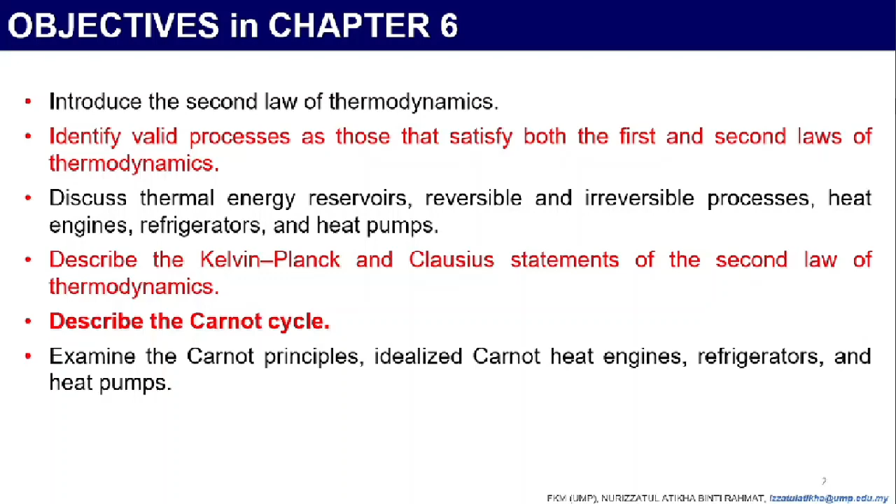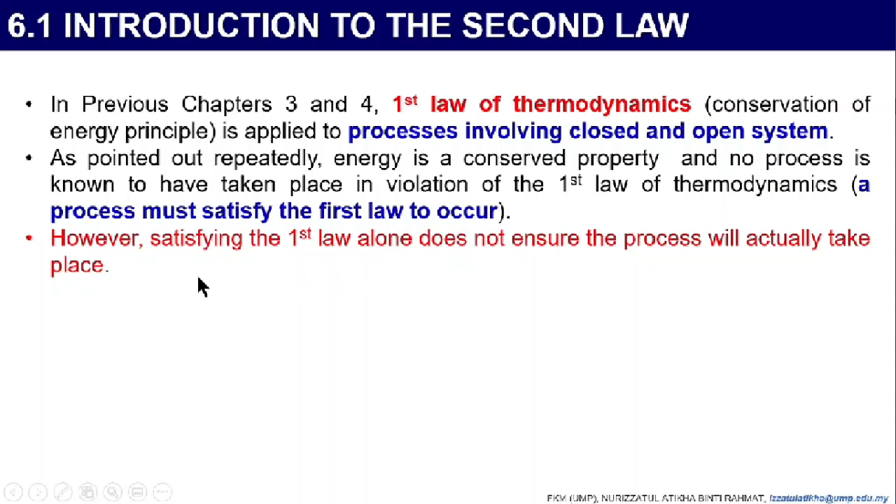In previous chapters 3 and 4, the first law of thermodynamics, where the conservation of energy principle is applied to processes involving closed and open systems, was discussed. As pointed out repeatedly, energy is a conserved property, and no process is known to have taken place in violation of the first law, where a process must satisfy the first law to occur. However, satisfying the first law alone does not ensure the process will actually take place. That is why we will learn in this chapter about the second law of thermodynamics.

Let's see this situation. Situation 1: a cup of hot coffee left in a cooler room. What will happen? Normally, you can predict what will happen - the coffee will eventually cool off. This process satisfies the first law of thermodynamics, since the amount of energy lost by the coffee is equal to the amount of heat gained by the surrounding air. We remember the energy balance equation for the first law, where energy is conserved: E in minus E out equals delta E.

Now let's see situation 2: a cup of hot coffee left in a cooler room. What will happen? For the reverse process, the hot coffee getting even hotter in a cooler room - this process will never take place. Yet doing so will not violate the first law, as long as the amount of energy lost by the air is equal to the amount gained by the coffee.

As you can see, situation 1 and situation 2 are the same. However, what happens in situation 1 and situation 2 is different. In situation 1, the coffee will eventually cool off, satisfying the first law of thermodynamics, where the amount of energy gained and lost is the same. However, in situation 2, it is a reverse process where the hot coffee gets even hotter in a cooler room. The total amount of energy is still the same; however, it will never take place. It is not violating the first law, but it will never take place.

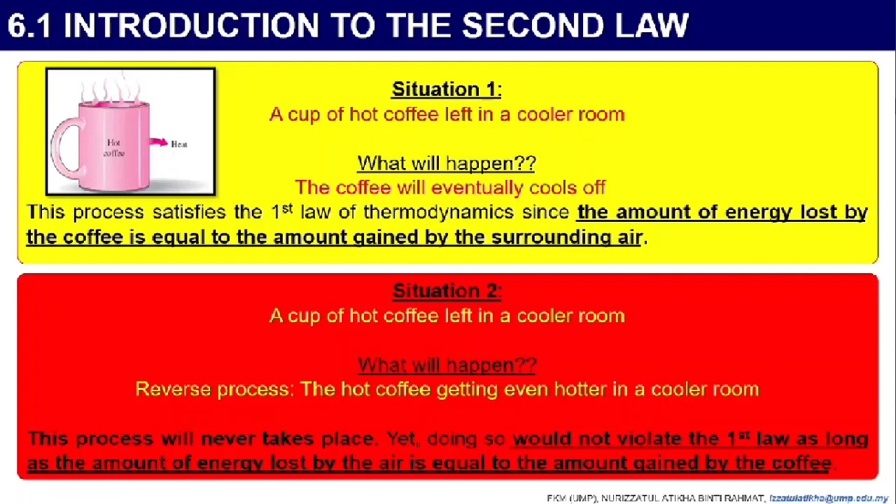Let's see: for situation 1, a cup of hot coffee does not get hotter in a cooler room. Situation 2, transferring heat to a wire will not generate electricity. These processes cannot occur even though they are not in violation of the first law. So processes must be conducted in one way, where processes occur in a certain direction and not in the reverse direction, because these processes cannot occur even though they do not violate the first law.

For example, if you touch something that is hot, you will feel burned. You will not feel cold. So that is already confirmed in this world - it is like sunnatullah, it happens like that, and it cannot become reverse.

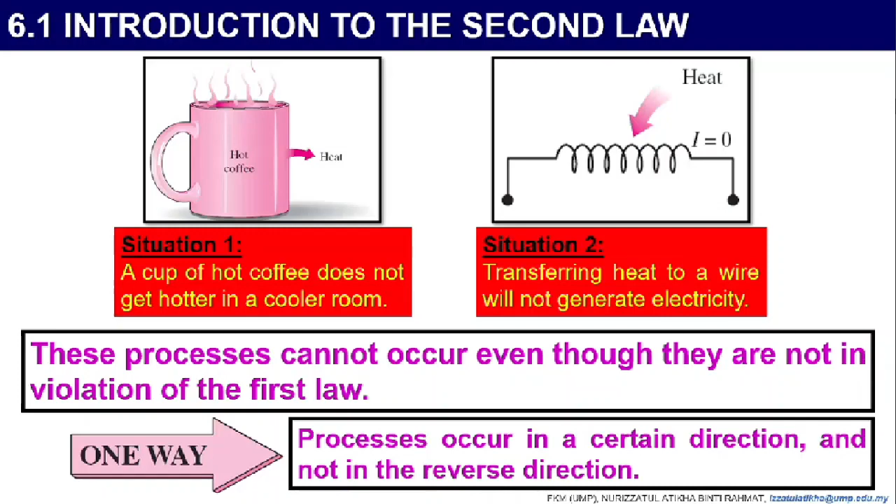So in this chapter we will learn about the second law and how a process is complete by satisfying both the first and second law. It's already written here: a process must satisfy both the first and second laws of thermodynamics to proceed.

Let's see the major uses of the second law. The second law may be used to identify the direction of processes. It also asserts that energy has quality as well as quantity. The first law is concerned with the quantity of energy and the transformation of energy from one form to another, with no regard to its quality.

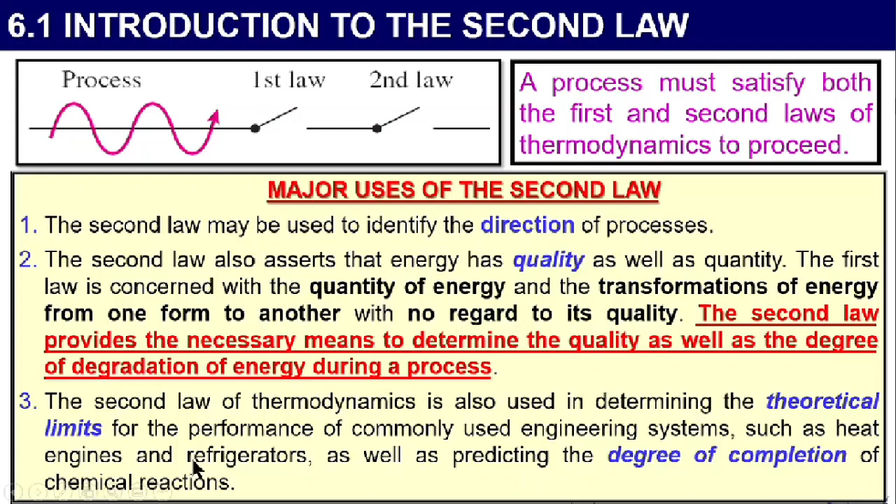However, the second law provides the necessary means to determine the quality as well as the degree of degradation of energy during a process. The second law of thermodynamics is also used in determining the theoretical limits for the performance of commonly used engineering systems such as heat engines and refrigerators, as well as predicting the degree of completion of chemical reactions.

Now we have learned about the definition of second law of thermodynamics. So now in subtopic 6.2, I will explain about the thermal energy reservoirs. What is thermal energy reservoirs? I believe most of you already understand what reservoirs are.

A thermal energy reservoir is a hypothetical body with a relatively large thermal energy capacity. How to calculate thermal energy capacity? Mass times specific heat. It can supply or absorb finite amounts of heat without undergoing any change in temperature, and this is called a thermal energy reservoir or just a reservoir.

In practice, large bodies of water such as oceans, lakes, rivers, as well as the atmospheric air can be modeled accurately as thermal energy reservoirs because of their large thermal energy storage capabilities or thermal masses. So thermal energy reservoirs can supply or absorb a finite amount of heat without undergoing any change in temperature.

For example, you pour one full kettle of hot water into a sea, into an ocean at the beach. So will the sea change temperature? No, it will not change temperature even though the sea absorbs the amount of heat from the hot water. That is the meaning of thermal energy reservoirs.

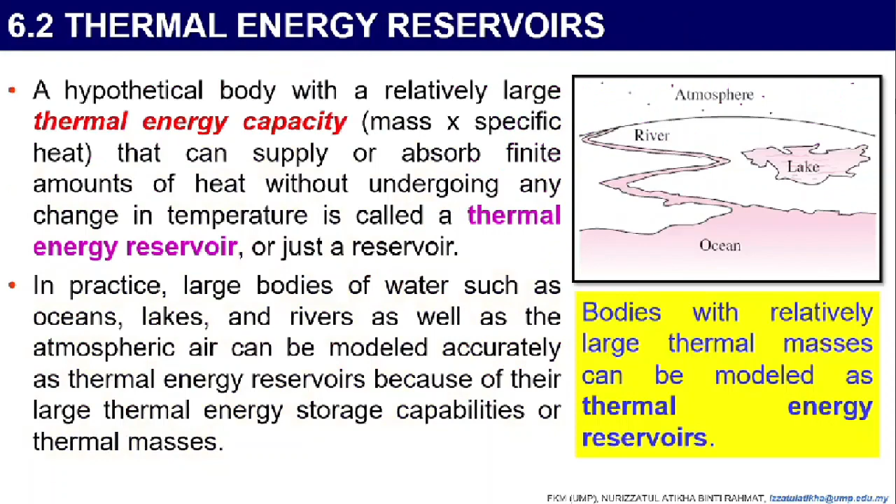A body does not have to be large in size to be considered a reservoir. This means that any physical body whose thermal energy capacity is large relative to the amount of energy it supplies or absorbs can be the reservoir.

A reservoir that supplies energy in the form of heat is called a source, and the one that absorbs energy in the form of heat is called a sink. Thermal energy reservoirs are also called heat reservoirs, so we have source and also sink. Thermal energy source will supply heat, thermal energy sink will absorb heat. But both of these are thermal energy reservoirs.

Now I will show you one video on the definition of second law and also some related information on the heat engine. So you guys can see from this video.

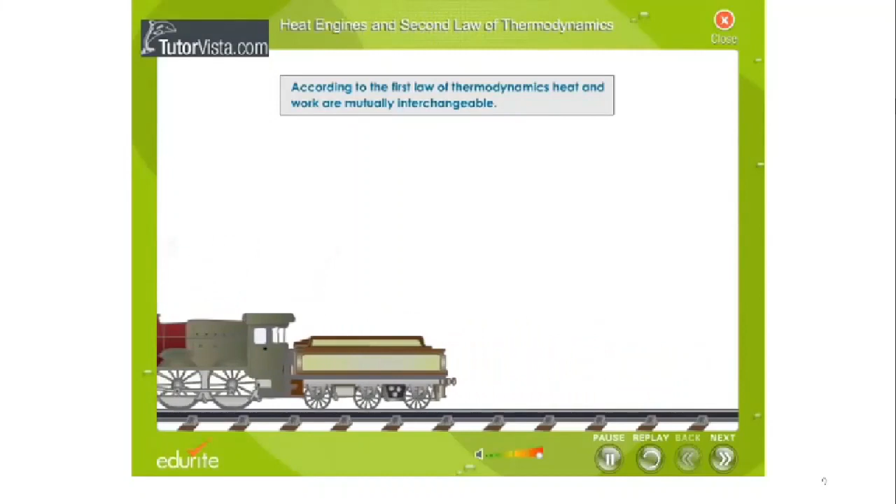Heat engines and second law of thermodynamics. According to the first law of thermodynamics, heat and work are mutually interchangeable. This law does not mention the direction of flow of heat. The second law of thermodynamics gives the direction of flow of heat energy. Before stating the law, let us see how heat energy is converted into mechanical energy in a heat engine.

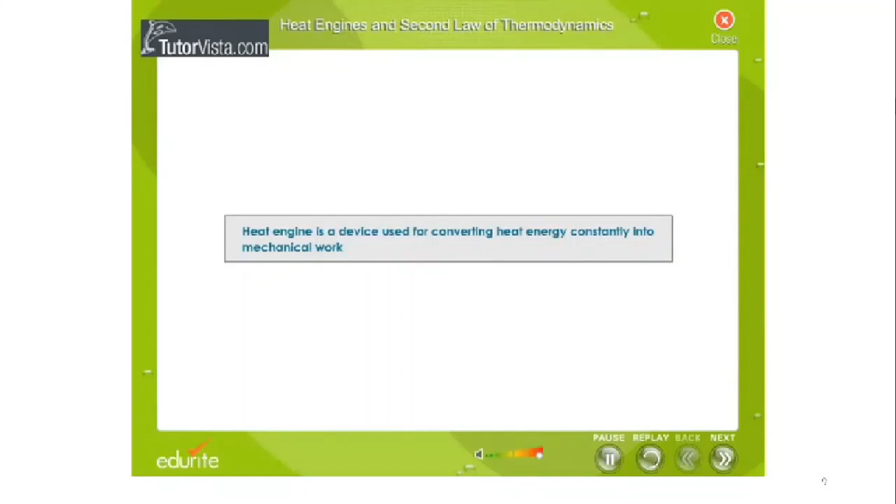A heat engine is a device used for converting heat energy constantly into mechanical work. The schematic diagram of a heat engine is shown here. The three essential parts of a heat engine are the source or hot body, the working substance, and the sink or cold body.

The working substance is taken along a cycle of operations. In this process, the working substance absorbs heat from the source, transforms part of it into mechanical energy, and the remaining part of heat is rejected to the sink. After completing the operation, the working substance comes back to its original state.

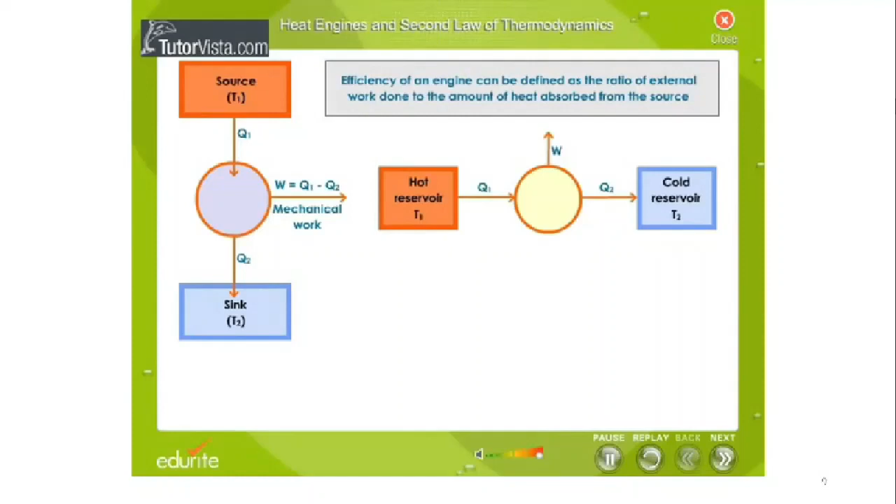Heat energy is never converted completely into mechanical energy, that is, the efficiency of a heat engine is never equal to 100%. We can define efficiency of an engine as the ratio of external work done to the amount of heat absorbed from the source. In heat engines, the working substance takes heat Q1 from the source at temperature T1, rejects heat Q2 to the sink at temperature T2, and does some work W. Eta is equal to Q1 minus Q2 by Q1. Eta is equal to 1 minus Q2 by Q1.

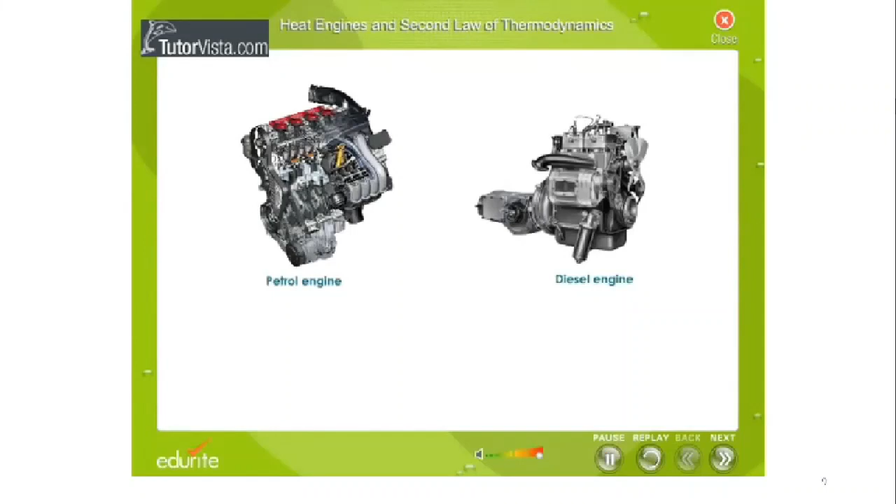There are two types of heat engines: internal combustion engine and external combustion engine. Petrol and diesel engines are internal combustion engines. The steam engine is an external combustion engine. Click on the link provided to see the working of an internal combustion engine.

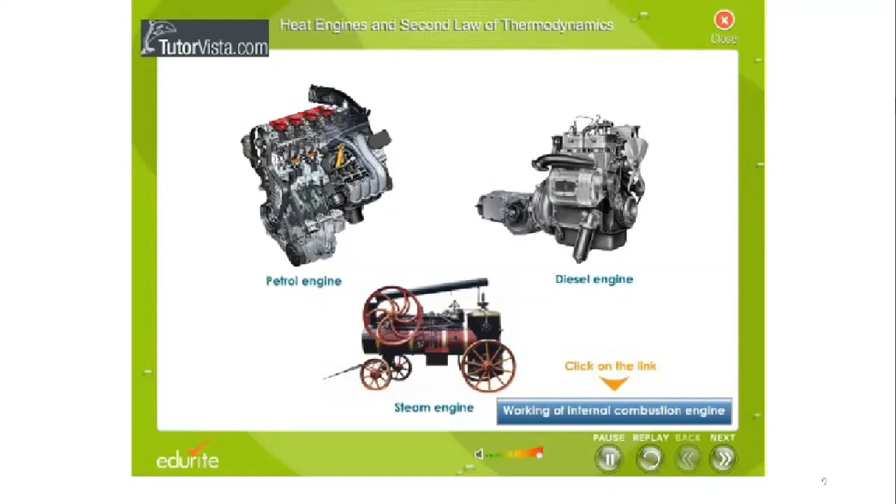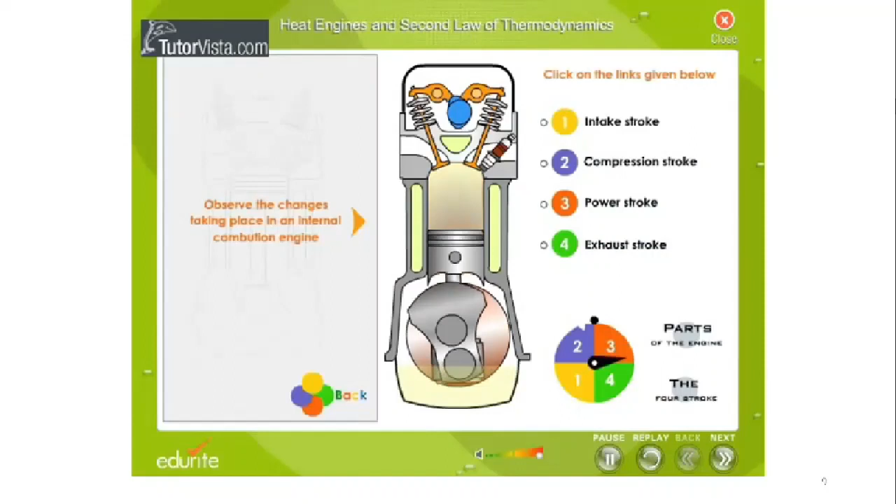Here you can see the process of an internal combustion engine, from intake stroke to compression stroke, and then power stroke, and then exhaust stroke.

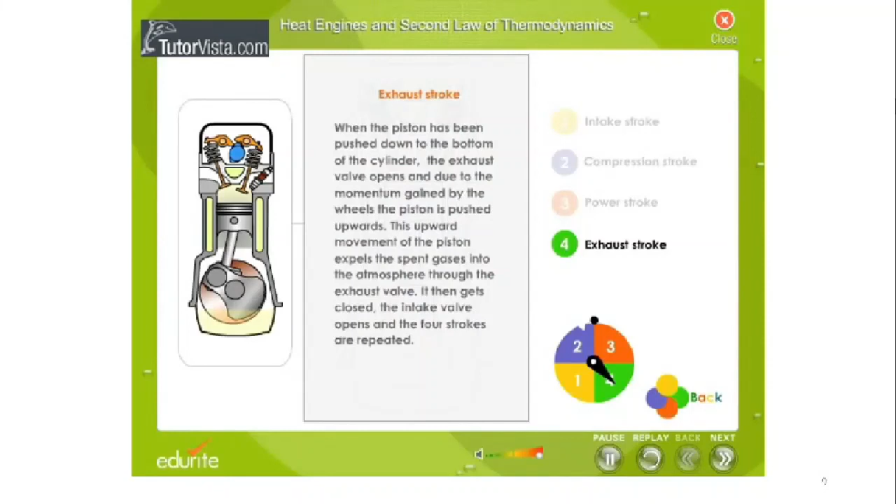The fact that heat energy is never completely converted to mechanical energy has become the second law of thermodynamics. There are several equivalent statements of the second law of thermodynamics.

Lord Kelvin stated: 'It is impossible to construct a device operating in a cycle for the sole purpose of extracting heat from a reservoir and changing it entirely into an equal amount of work without rejecting a part of the heat.' This statement simply means an engine can convert only a part of the heat energy into mechanical work.

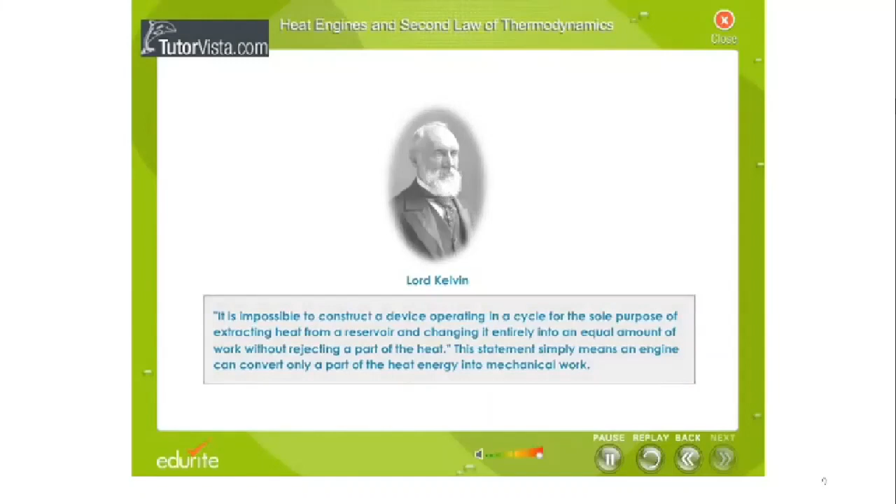Clausius statement: 'It is not possible for a self-acting machine, unaided by any external agency, to transfer heat from a body at low temperature to another body at higher temperature.' This statement also means no heat engine is 100% efficient.

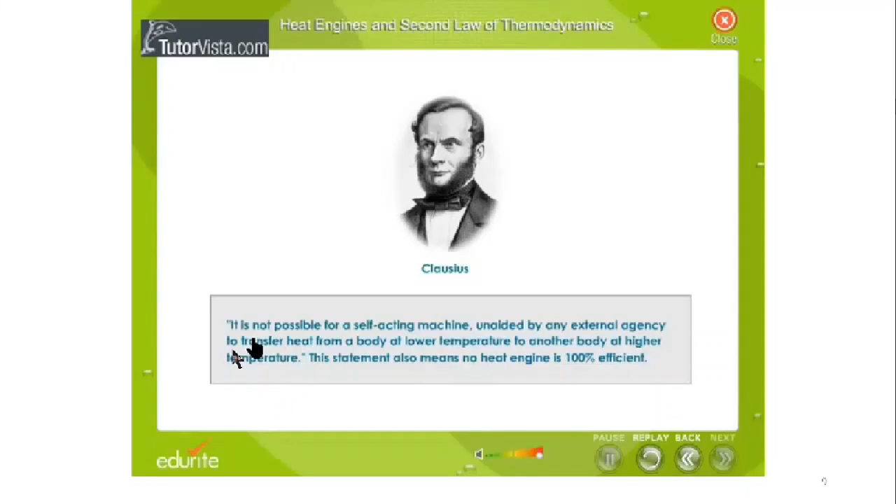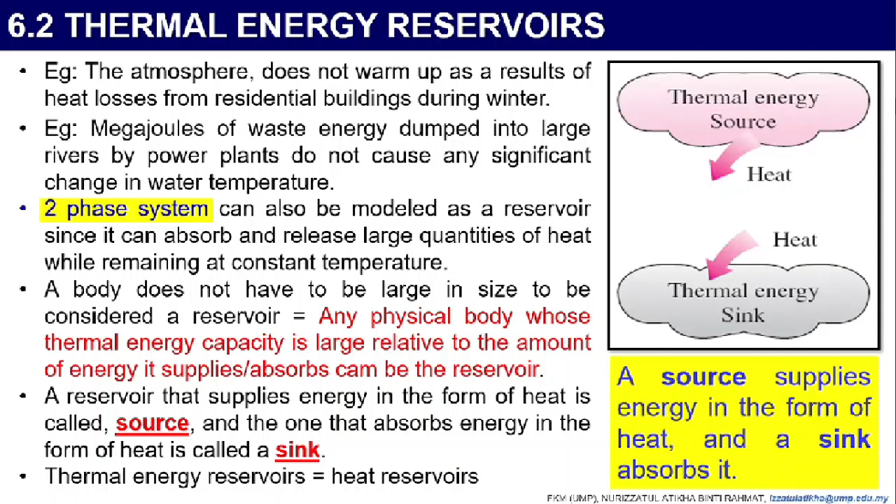You have learned previously about the definition of the second law, and then about the thermal energy reservoir, where we have the source that supplies heat to produce mechanical work, and the thermal energy sink that absorbs the heat. From this we can understand that the heat engine is associated with these thermal energy reservoirs.

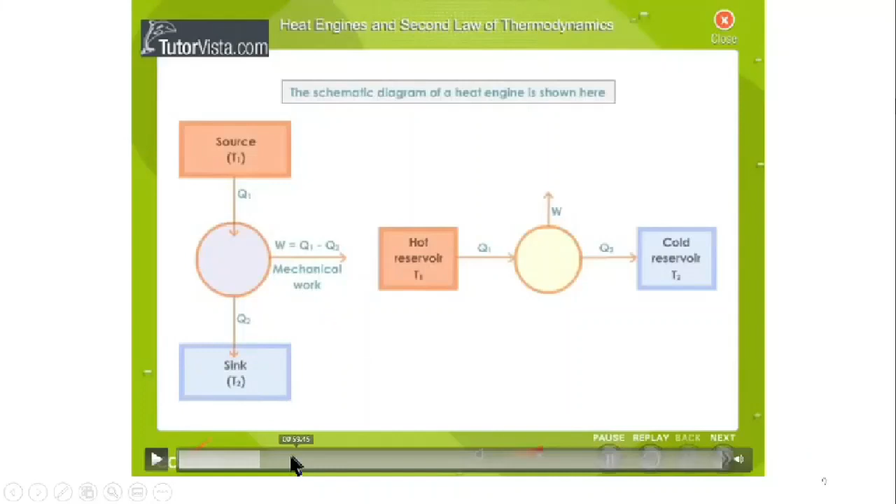We have a source that supplies heat Q1 to this device, and it will release some heat Q2, which is absorbed in the sink, the thermal energy reservoir sink. It is also stated that in a heat engine the total efficiency is not 100%, because we have work here. Work equals Q1 minus Q2. What is supplied by the source will never become 100% work because there is Q2 released from this device. So that is what the video said just now.

Now we will continue on subtopic 6.3, heat engines. Work can easily be converted to other forms of energy, but converting other forms to work is not easy.

Thus, work can be converted to heat directly and completely, but converting heat to work requires a special device called a heat engine. So in a way, a heat engine is a device to convert heat to mechanical work.

Heat engines differ considerably from one another, but all can be categorized by the following: first, they receive heat from a high temperature source, such as solar energy, an oil furnace, or a nuclear reactor. They convert part of this heat to work, usually in the form of a rotating shaft. Then they reject the remaining waste heat to a low temperature sink, such as the atmosphere, rivers, or ocean, and they operate on a cycle.

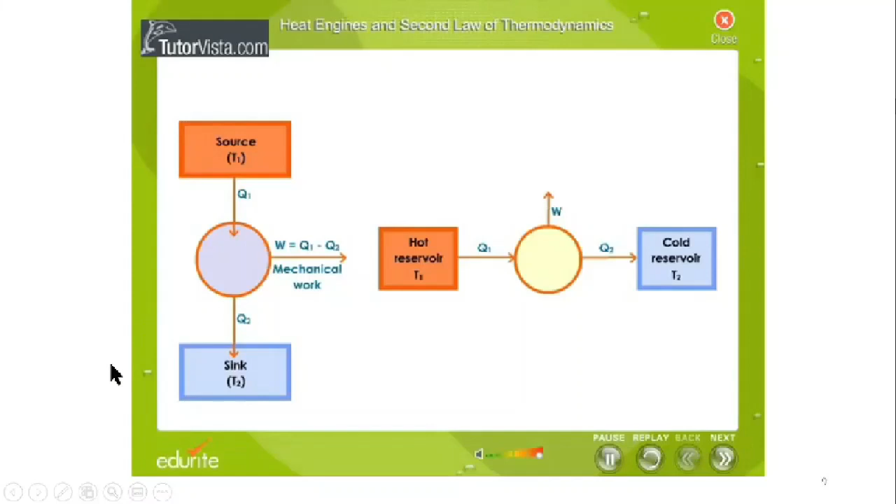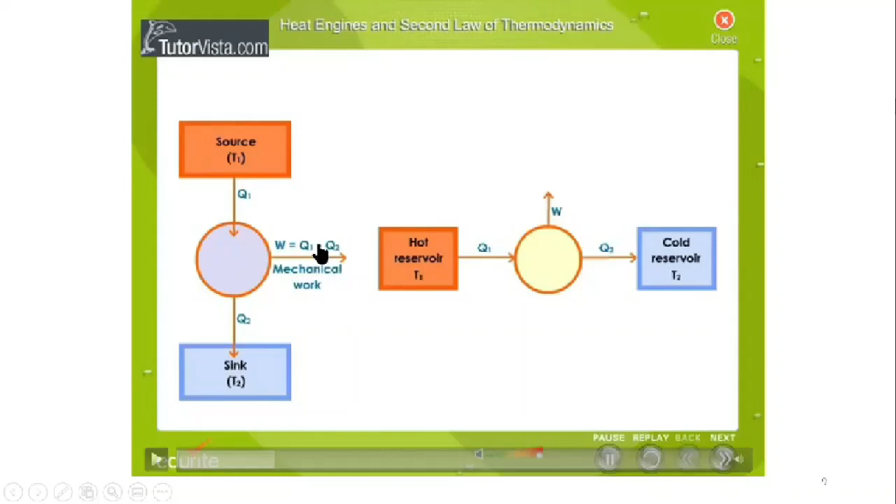As already explained before in this video, we have the heat engine here. The device receives heat Q1 from the source, the thermal energy reservoir of the source, which supplies heat. It then releases some heat, Q2, to the thermal energy reservoir sink, and from this heat it converts part to mechanical work. So this is the diagram of the heat engine as explained in this definition.

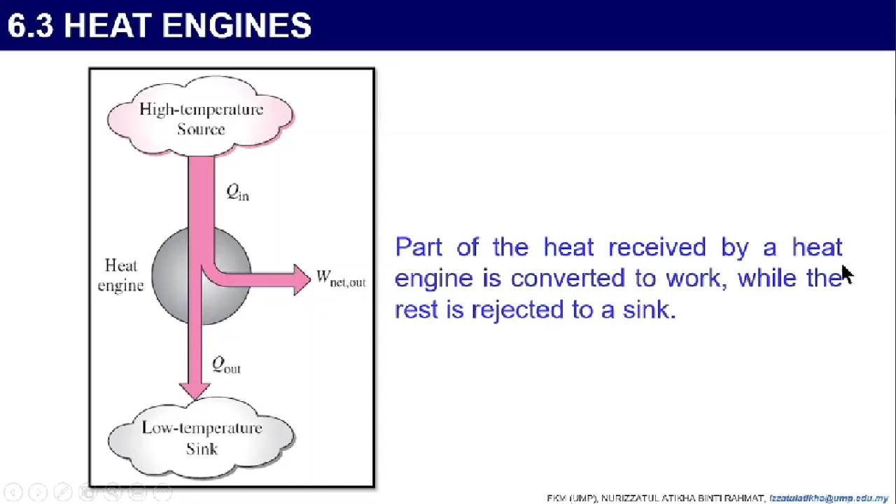High temperature source supplies Q in to the heat engine, which releases Q out to the low temperature sink, and gives W, the net work out. Part of the heat received by a heat engine is converted to work, while the rest is rejected to a sink.

Now, this is one example of a heat engine: a steam power plant. The work-producing device that best fits the definition of a heat engine is the steam power plant. It is an external combustion engine. The combustion takes place outside the engine, and the thermal energy released during this process is transferred to the steam as heat.

This is the schematic figure of a steam power plant. We have Q in going to the boiler, and then it goes to the turbine and releases some work. At the same time, it releases Q out to the condenser, and we also have a pump here to make sure the steam power plant works in a cycle. So Q in is the amount of heat supplied to the steam in the boiler from a high temperature source, in this case the furnace.

Q out, amount of heat rejected from steam in condenser to a low temperature sink, for example, the atmosphere or river or ocean. W out is the amount of work delivered by steam as it expands in turbine. W in, amount of work required to compress water to boiler pressure.

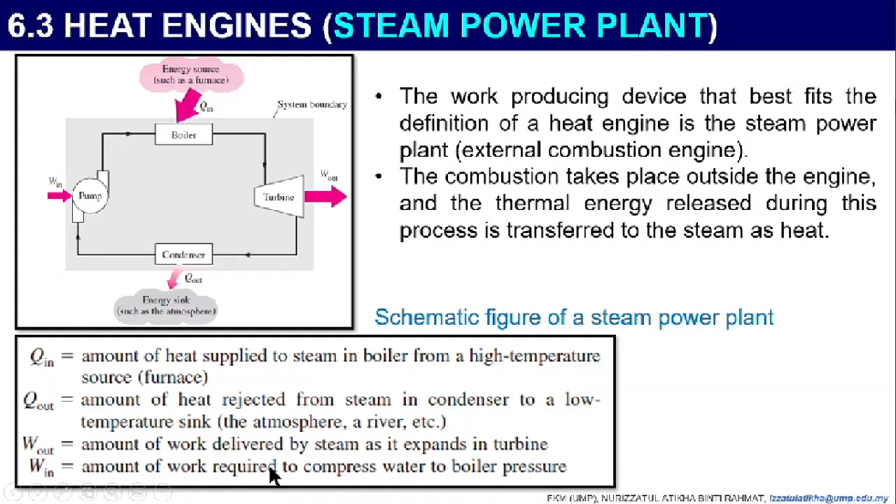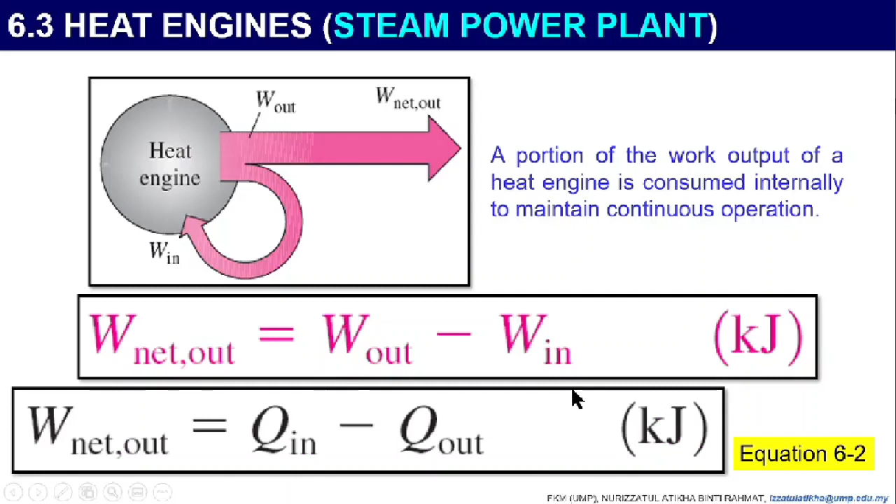Okay, this is the example. Heat engine, W out, W net out, and also W in. A portion of the work output of a heat engine is consumed internally to maintain continuous operation. So W net out equal to W out minus W in. At the same time, W net out equal to Q in minus Q out. The SI unit is kilojoule.

So from equation 6.2, W net out equal to Q in minus Q out, Q out represents the magnitude of the energy wasted in order to complete the cycle. But Q out is never zero. As you already watched in the video just now, Q out will never be zero. If this is zero, then W net out is equal to Q in, but it is impossible. The net work output of a heat engine is always less than the amount of heat input.

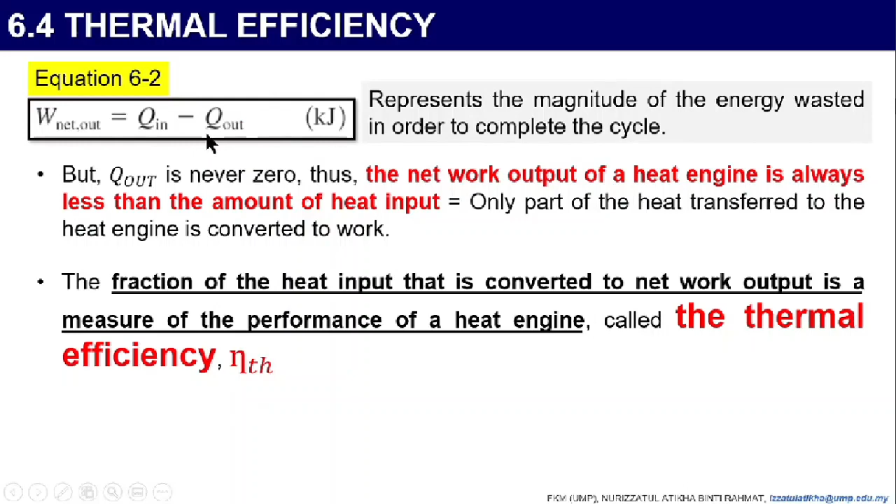Only part of the heat transferred to the heat engine is converted to work. If Q out is zero, W net out will be equal to Q in, so the efficiency will be 100%, and it will never happen. The fraction of the heat input that is converted to net work output is a measure of the performance of a heat engine called the thermal efficiency. So thermal efficiency will never be 100% because there will be Q out released from the heat engine. It will never be zero.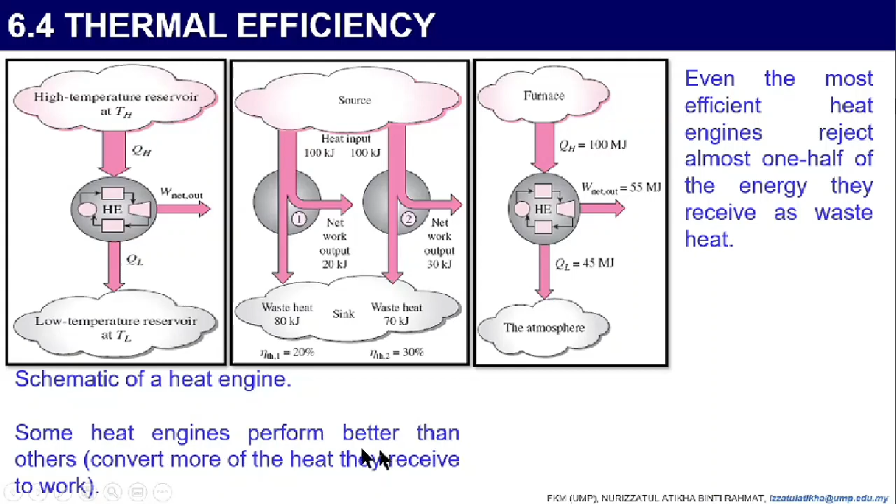Here the heat supplied by the furnace is 100 megajoule, work net out is 55 megajoule, and it only releases 45 megajoule of heat to the atmosphere. Some heat engines perform better than others and convert more of the heat they receive to work.

So, in order to know which heat engine is better than the other, we have to calculate the thermal efficiency, eta. The equation will be net work output divided by the total heat input, or W net out equal to Q in minus Q out, and then eta equal to W net out over Q in. At the same time, QH is equal to Q in, QL equal to Q out, so we can derive the same equation of the thermal efficiency eta.

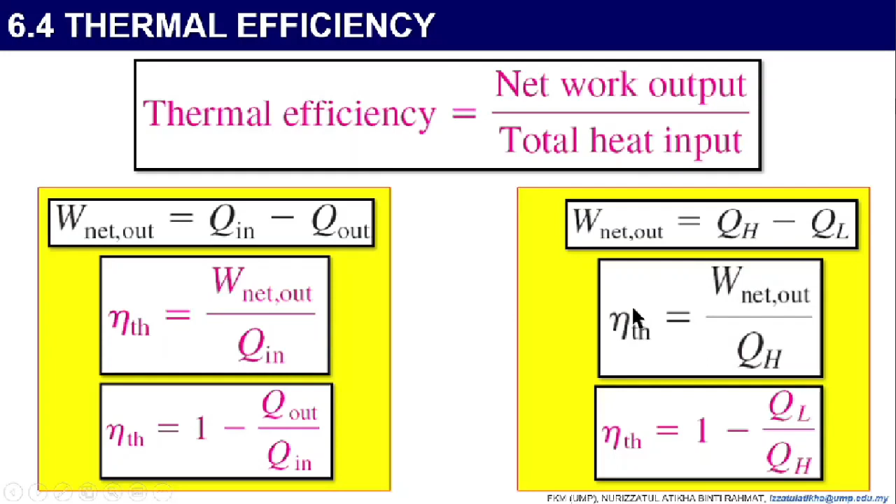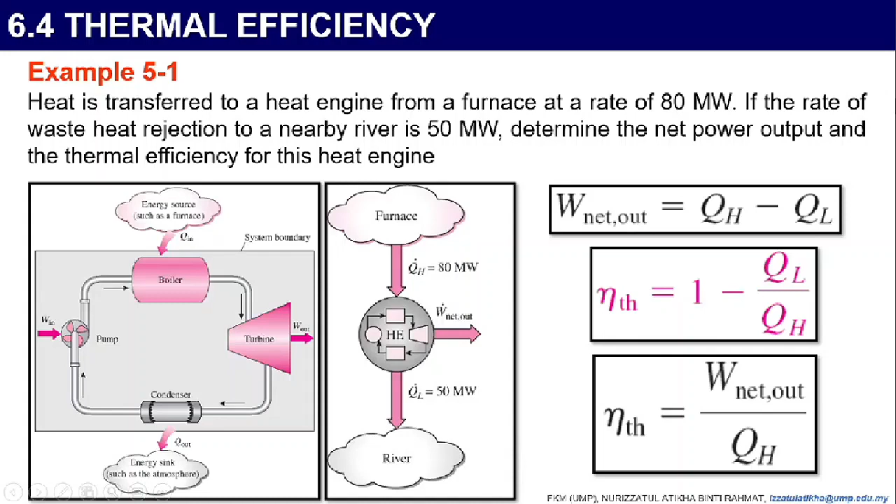So I already give you one example here. Heat is transferred to a heat engine from a furnace at a rate of 80 megawatt. If the rate of waste heat rejection to a nearby river is 50 megawatt, determine the net power output and the thermal efficiency for this heat engine. So you can use this equation and try to do this question by yourself.

Now the video that we watched just now stated the second law of thermodynamics, the Kelvin-Planck statement, which is related to heat engines. So I just want to recap what this statement is. In the Kelvin-Planck statement, it is impossible for any device that operates on a cycle to receive heat from a single reservoir and produce a net amount of work.

So it is impossible when you get Q dot H equal to 100 kilowatt, and then you deliver W net out equal to 100 kilowatt. It means that there is no QL, Q dot L equal to 0.

So it is impossible like this because every heat engine, even the most powerful heat engine, will still release a small amount of heat to the thermal energy reservoir sink. It cannot deliver 100% thermal efficiency. No heat engine can have a thermal efficiency of 100%.

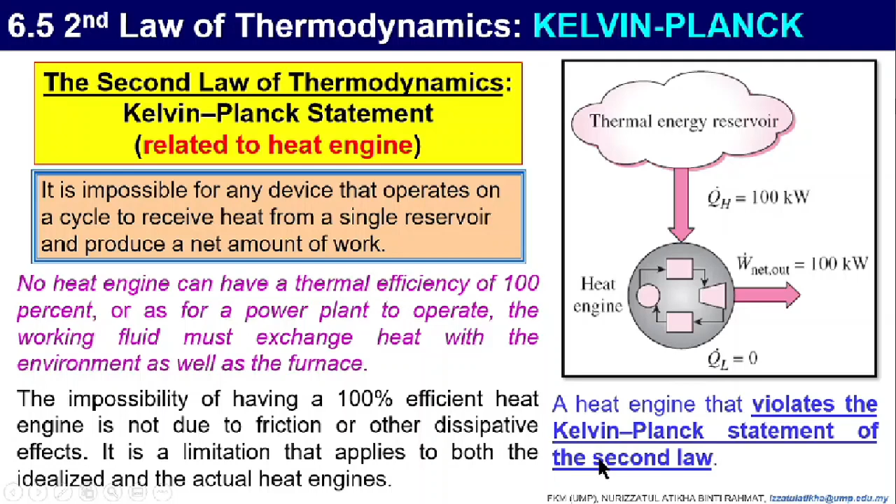For a power plant to operate, the working fluid must exchange heat with the environment as well as the furnace. The impossibility of having a 100% efficient heat engine is not due to friction or other dissipative effects. It is a limitation that applies to both the idealized and the actual heat engine. So this is the example of a heat engine that violates the Kelvin-Planck statement of the second law. Now, refrigerators.

Just now we learned about heat engines, so now let's move on to the refrigerator. Energy transfer in the form of heat, from a higher temperature body to a lower one, takes place between the body and the surrounding medium until thermal equilibrium is established. So you have 25 degree room air, and over time it becomes much colder, 5 degrees Celsius. You can see the amount of heat, 8 joules per second and 16 joules per second. So the temperature becomes smaller.

The reverse process, the transfer of heat from a low temperature medium to a high temperature one, requires special devices, namely refrigerators. It is the reverse process of a heat engine. You can see here the cold refrigerated space at TL, temperature low. It supplies an amount of heat QL to the refrigerator system, and the refrigerator system releases the amount of heat QH to the warm environment. And there is a net work input required in the refrigerator. So basically, it is a reverse process of a heat engine.

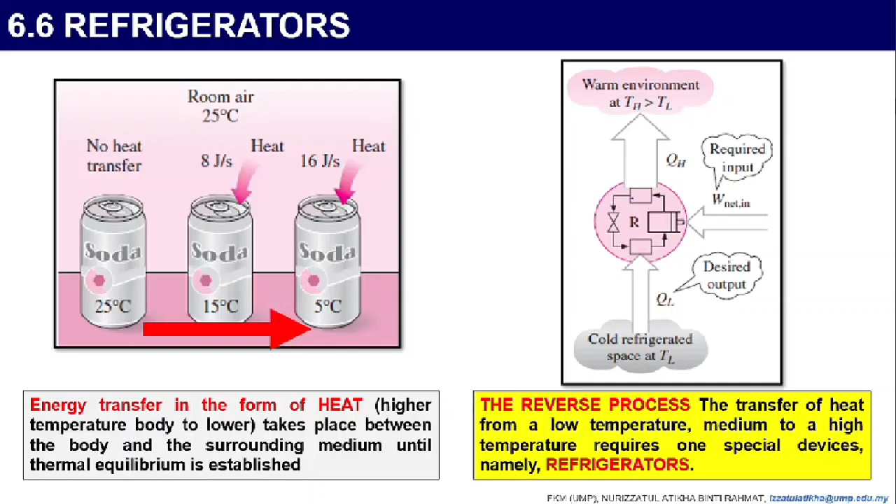I think you already noticed that behind your fridge there is a coil. Near this coil, it is very warm. That means this process is happening: the refrigerator is kept cool, but it releases heat to the environment, so we can sense the heat near the coil. So refrigerators, like heat engines, are cyclic devices.

The working fluid used in the refrigeration cycle is called refrigerant. The most frequently used refrigeration cycle is the vapor compression refrigeration cycle, involving four main components: a compressor, a condenser, an expansion valve, and an evaporator. In a household refrigerator, the freezer compartment where heat is absorbed by the refrigerant serves as the evaporator. Meanwhile, the coils behind the refrigerator where heat is dissipated to the kitchen air serve as the condenser. So this is what I explained to you just now.

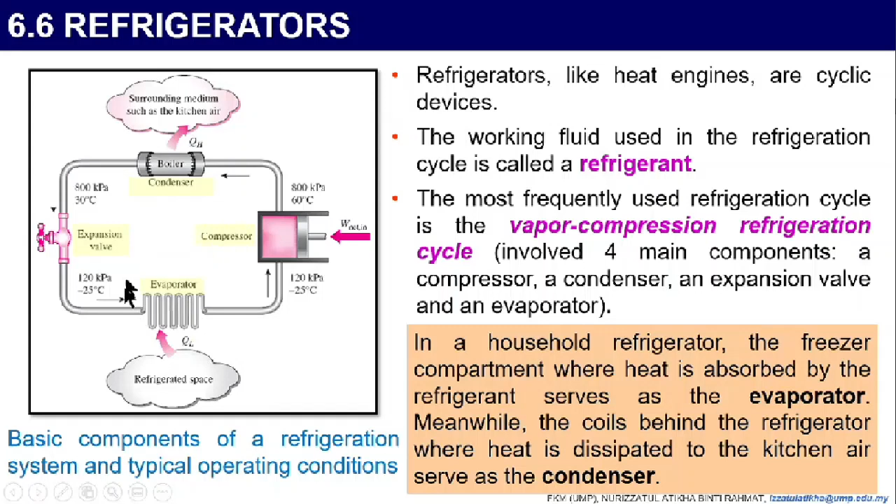So, basic components of the refrigeration cycle and typical operating conditions. We have four components: condenser, compressor, evaporator, and expansion valve. In a refrigerator, the first component is the compressor. The refrigerant enters the compressor as a vapor and is compressed to the condenser pressure. Then it moves to the condenser, number two. It leaves the compressor at a relatively high temperature and cools down and condenses as it flows through the coils of the condenser by rejecting heat to the surrounding medium.

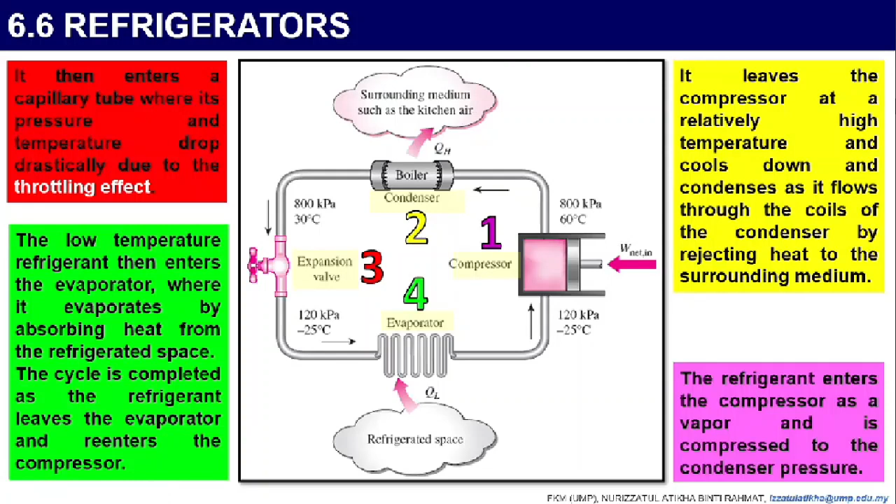Then it moves on to three, the expansion valve. It enters a capillary tube where its pressure and temperature drop drastically due to the throttling effect. And last, it moves to the evaporator; you can see a coil here. The low temperature refrigerant enters the evaporator, where it evaporates by absorbing heat from the refrigerated space. The cycle is completed as the refrigerant leaves the evaporator and re-enters the compressor. So this is the process of a refrigerator. Sometimes in the exam you will be asked to explain how refrigerators work, so you have to write like this.

So, recap. In the previous chapter, we learned about throttling valves, which are any kind of flow restricting devices that cause a significant pressure drop in the fluid. What is the difference between a turbine and a throttling valve, since both have a significant pressure drop? The pressure drop in the fluid is often accompanied by a large drop in temperature, and for that reason, throttling devices are commonly used in refrigeration and air conditioning applications.

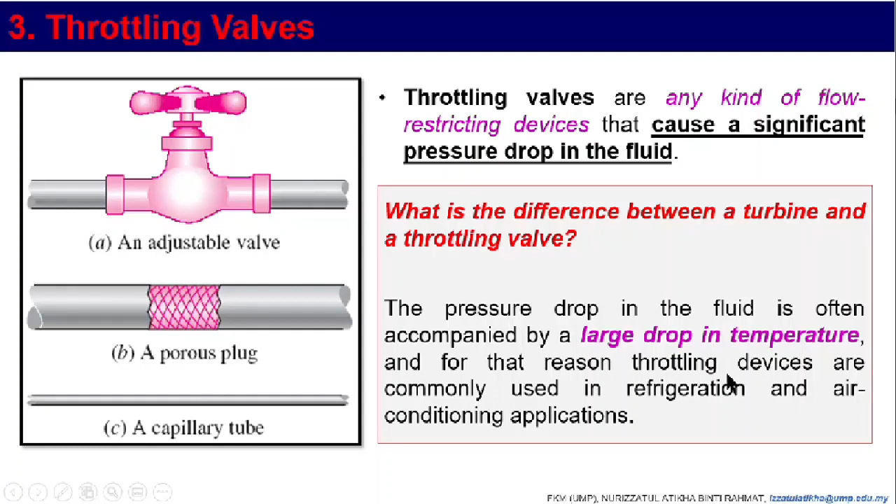Okay, so here we can see figures 5-30 and 5-31. The temperature of an ideal gas does not change during a throttling process. Since h = constant and h = h(T), h2 = h1. In this figure, during a throttling process, the enthalpy (flow energy plus internal energy) of a fluid remains constant, but internal and flow energies may be converted to each other.

The conservation of energy equation for a single-stream steady-flow device: it is flow energy Pv plus internal energy. So we get u2 + P2v2 = u1 + P1v1. Okay, this is internal energy and this is flow energy.

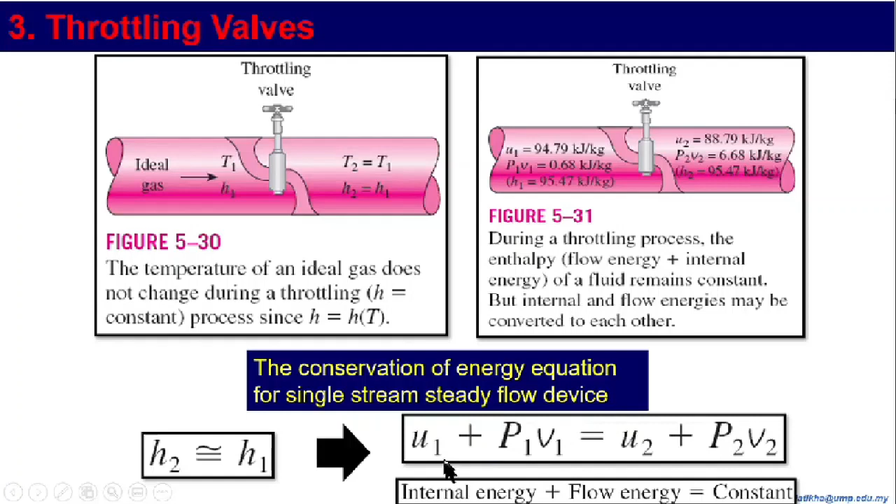The coefficient of performance of a refrigerator. The efficiency of a refrigerator is expressed in terms of the coefficient of performance, COPR. Remember, in a heat engine the efficiency is denoted with the symbol eta TH. But in a refrigerator, the coefficient of performance is denoted COPR. So this is how we see the efficiency of the refrigerator.

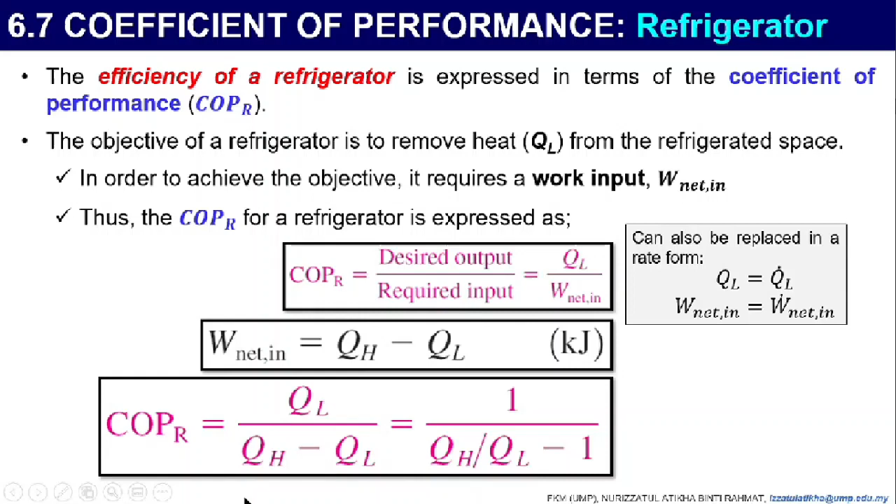The objective of a refrigerator is to remove heat QL from the refrigerated space. In order to achieve the objective, it requires a work input W net in. Thus, the COPR for a refrigerator is expressed as desired output divided by required input, QL over W net in. W net in equals QH minus QL, and the coefficient of performance equation can also be expressed in rate form. Okay, so you guys already know this one.

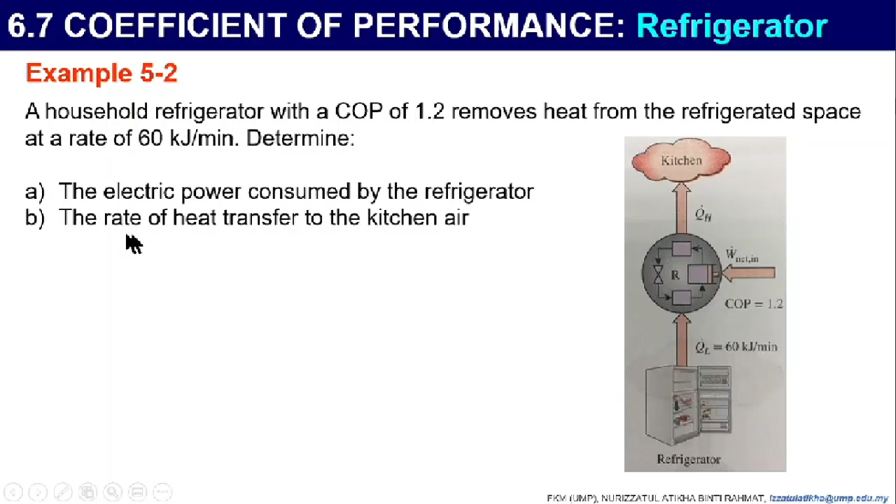So we have another example, example 5.2. A household refrigerator with a COP of 1.2 removes heat from the refrigerated space at a rate of 60 kJ per minute. Determine the electric power consumed by the refrigerator and the rate of heat transfer to the kitchen air. So this is the question and the answer. Here I also have another question for you. Please do it by yourself and refer to the answer provided in this slide.

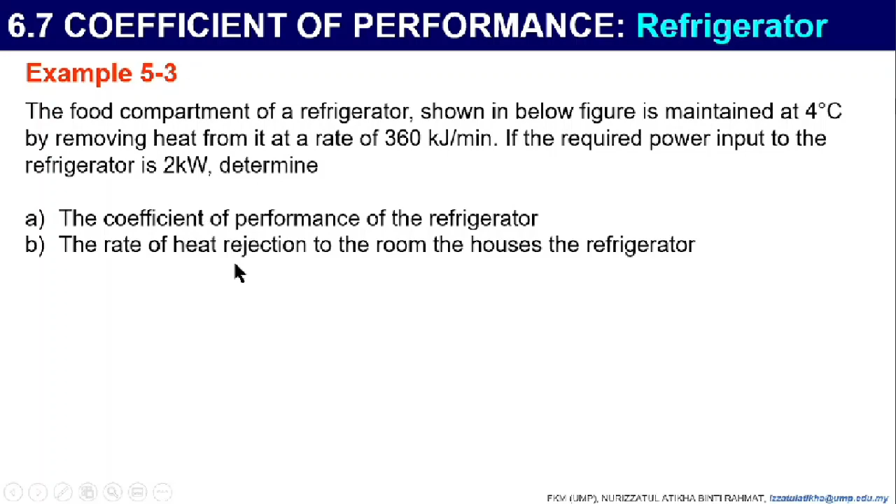Alright. Now we have learned heat engine and then air conditioner. Oh no, not air conditioner, it is refrigerator. So now we want to learn about the heat pump. Another device that transfers heat from a low-temperature medium to a high-temperature one is a heat pump. Refrigerators and heat pumps operate on the same cycle but differ in their objective.

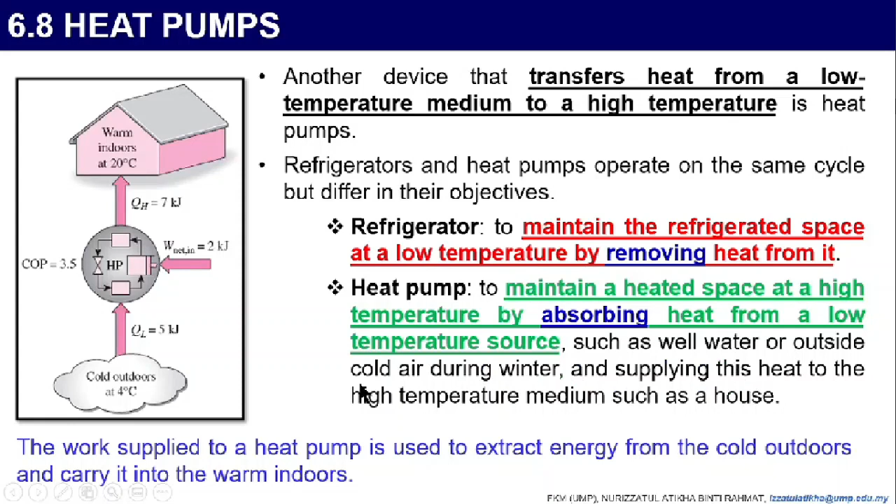For a refrigerator, it is to maintain the refrigerated space at a low temperature by removing heat from it. But for a heat pump, it is to maintain a heated space at a high temperature by absorbing heat from a low-temperature source, such as well water or cold outside air during winter, and supplying this heat to the high-temperature medium such as a house.

So how about if we place an ordinary refrigerator near the window of a house with its door open to the cold air outside during winter? What if we do that? We place an ordinary fridge near the window of a house, and now it is heavily raining or heavily snowing, so it is very cold outside. So what will happen?

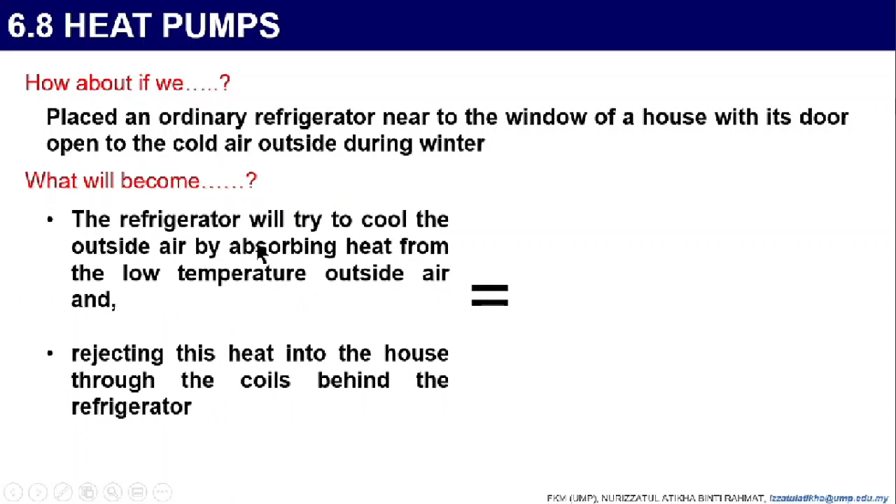The refrigerator will try to cool the outside air by absorbing heat from the low-temperature outside air and rejecting this heat into the house through the coils behind the refrigerator. So this is the mechanism of a heat pump.

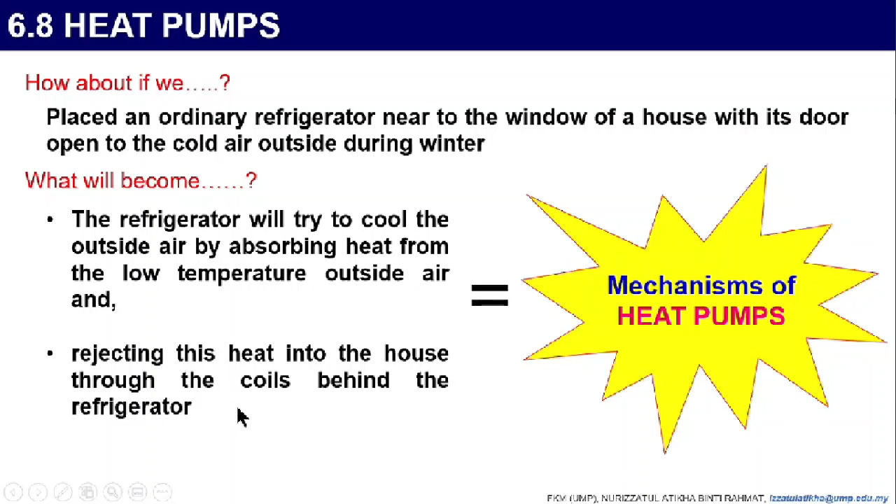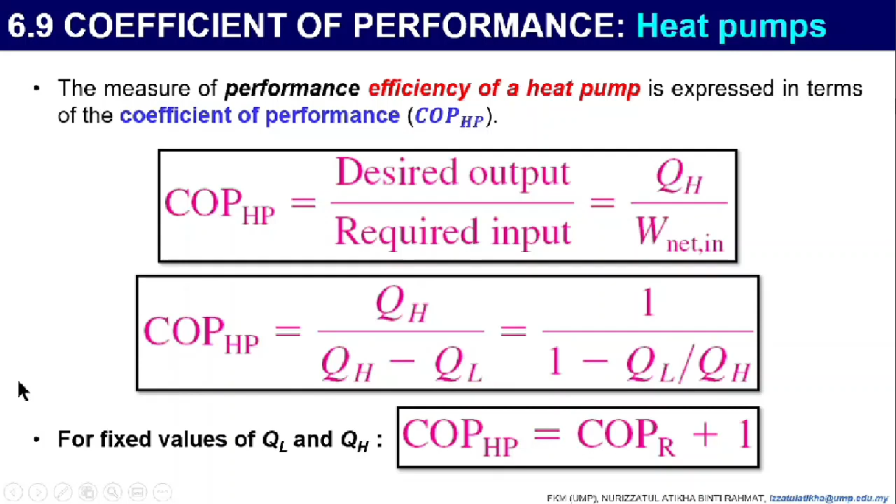Now we move on to the second law of thermodynamics, the Clausius statement. Just now we learned the Kelvin-Planck statement. So now it is from Clausius: it is impossible to construct a device that operates in a cycle and produces no effect other than the transfer of heat from a lower-temperature body to a higher-temperature body.

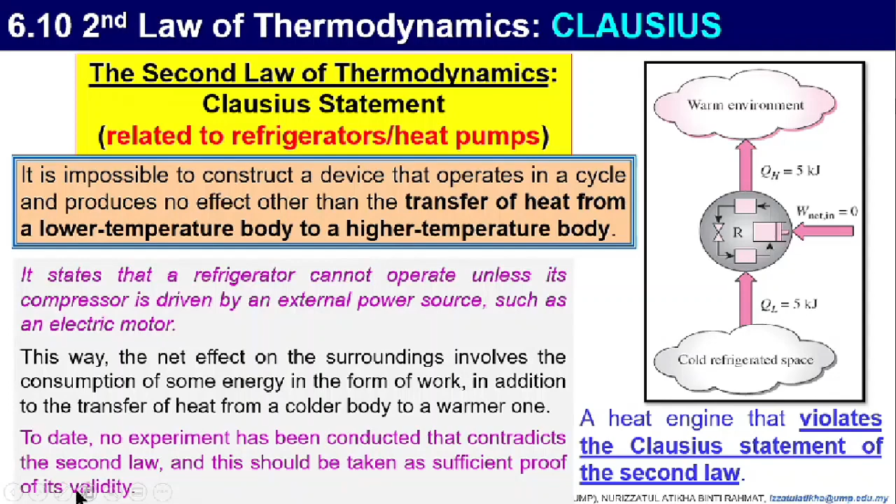It states that a refrigerator cannot operate unless its compressor is driven by an external power source such as an electric motor. This way, the net effect on the surroundings involves the consumption of some energy in the form of work in addition to the transfer of heat from a colder body to a warmer one. To date, no experiment has been conducted that contradicts the second law, and this should be taken as sufficient proof of its validity.

Okay, this is the example: prove that the violation of the Kelvin-Planck statement leads to the violation of the Clausius statement. You can read it by yourself. The Kelvin-Planck and the Clausius statements are equivalent in their consequences, and either statement can be used as the expression of the second law of thermodynamics.

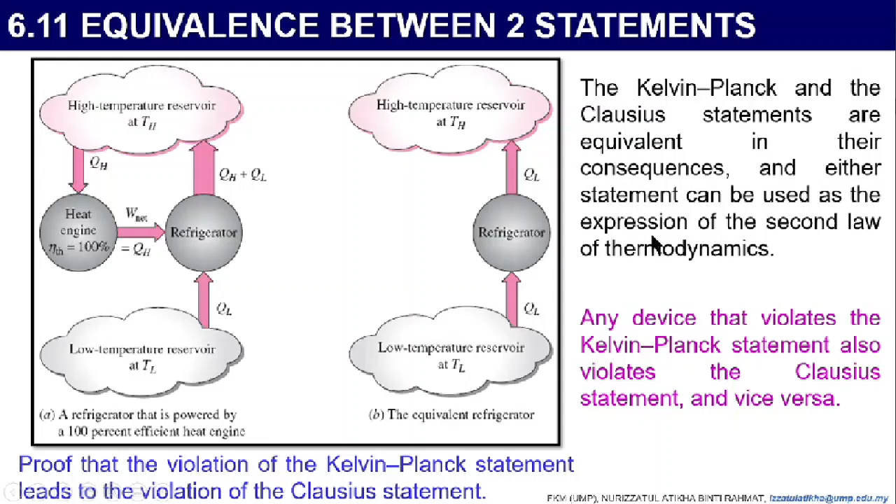Okay, last we will touch a little bit on Carnot cycle. So what is Carnot cycle?

Heat engines are cyclic devices, and the working fluid of a heat engine returns to its initial state at the end of each cycle. Because it's a cycle, it will return back to the initial state. So the net work, equal to the cycle efficiency, can be maximized by using the process that requires the least amount of work and delivers the most.

By using reversible process. The best known reversible cycle is the Carnot cycle, first proposed by a French engineer, Sadi Carnot, in 1824. The theoretical heat engine that operates on the Carnot cycle is called the Carnot heat engine. The Carnot cycle is composed of four reversible processes: two isothermal processes and two adiabatic processes. It can be executed either in a closed or steady flow system.

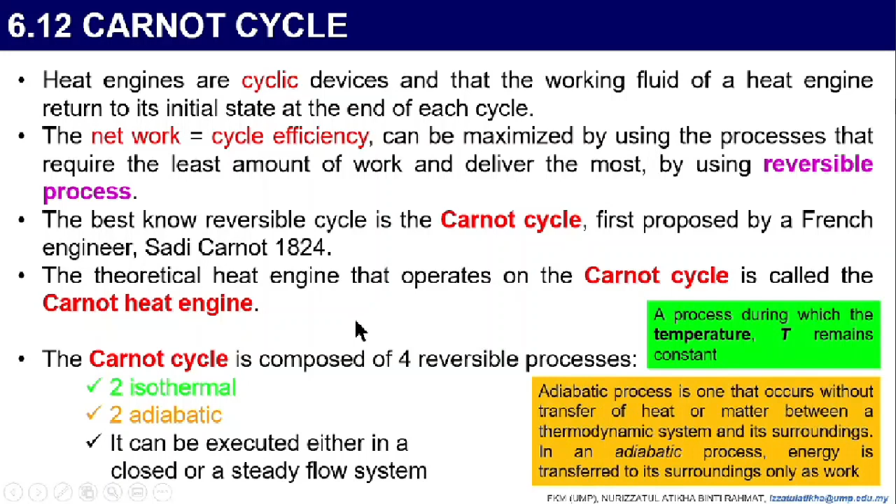So this is the cycle of a Carnot, Carnot cycle. I want you guys to read this from the slide and make sure you understand properly about this subtopic, because in chapter 6 there are lots of calculations on Carnot cycle.

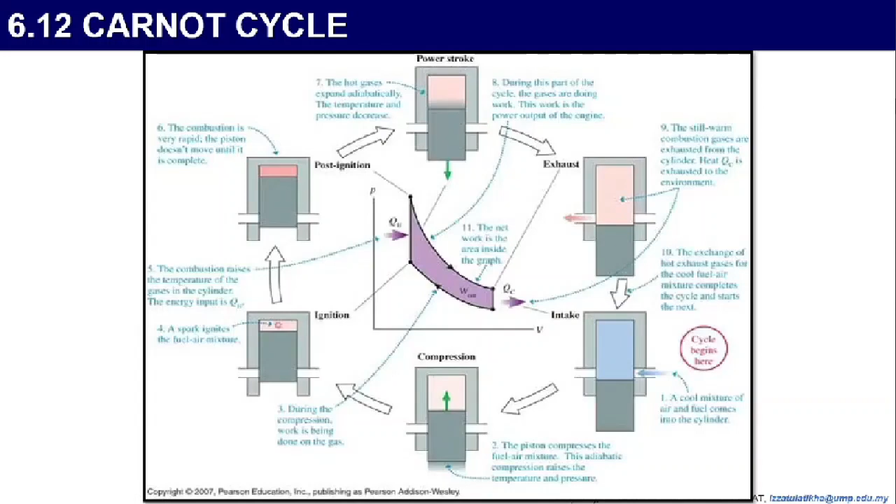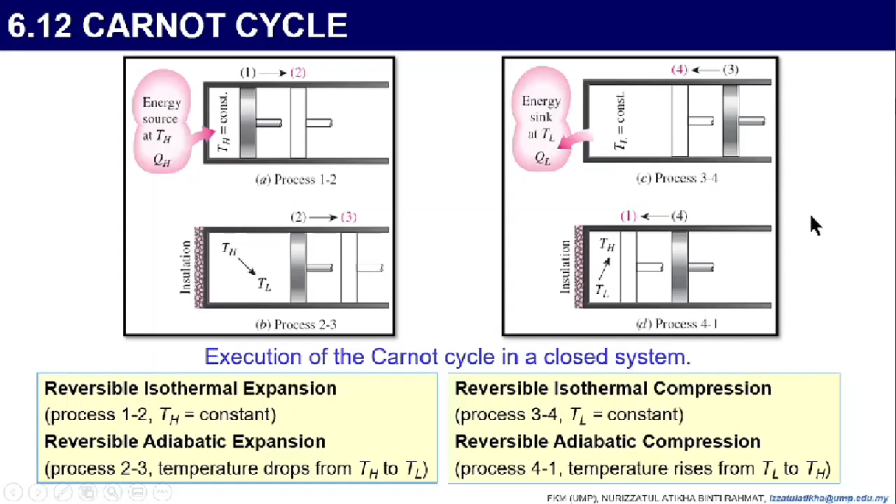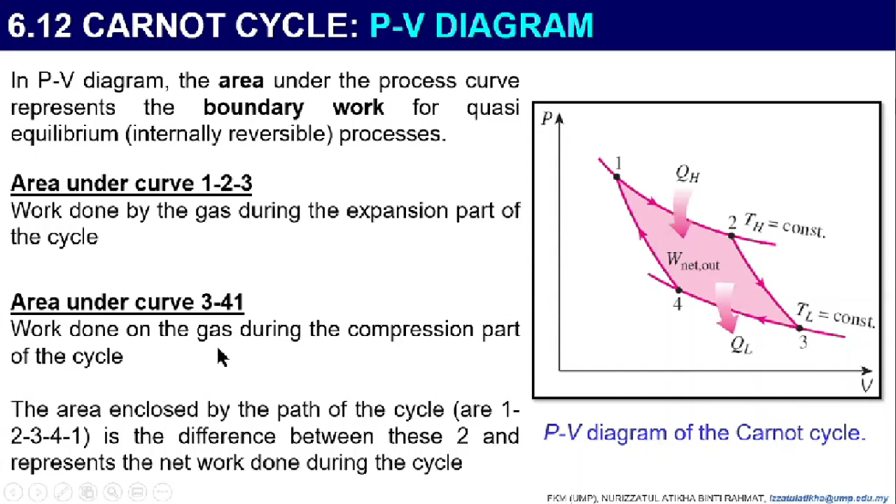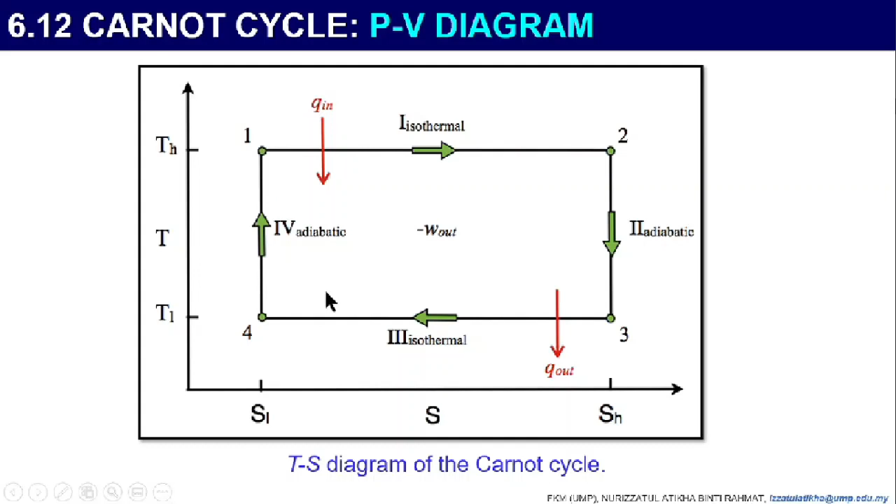Alright, so this is another diagram, for the T and S diagram of the Carnot cycle. And here you can see the diagram, or I mean how it works and how it relates to the PV and TV diagrams.

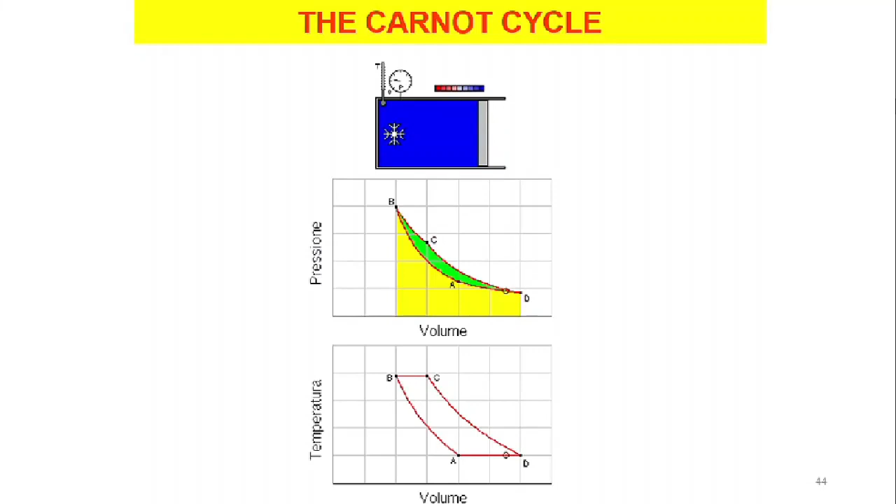So the reverse Carnot cycle — the Carnot heat engine cycle is a totally reversible cycle. Therefore, all the processes that comprise it can be reversed, in which case it becomes the Carnot refrigeration cycle. So if it can reverse, it is the same as the refrigerator process. So we call this the Carnot refrigeration cycle.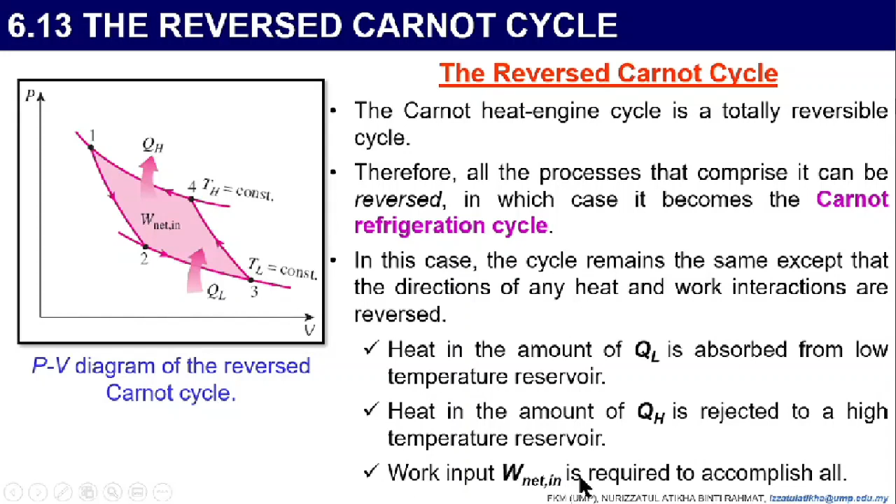In this case, the cycle remains the same except that the direction of any heat and work interaction are reversed. So heat in the amount of QL is absorbed from the low temperature reservoir, and heat in the amount of QH is rejected to a high temperature reservoir. Work input W net in is required to accomplish all this.

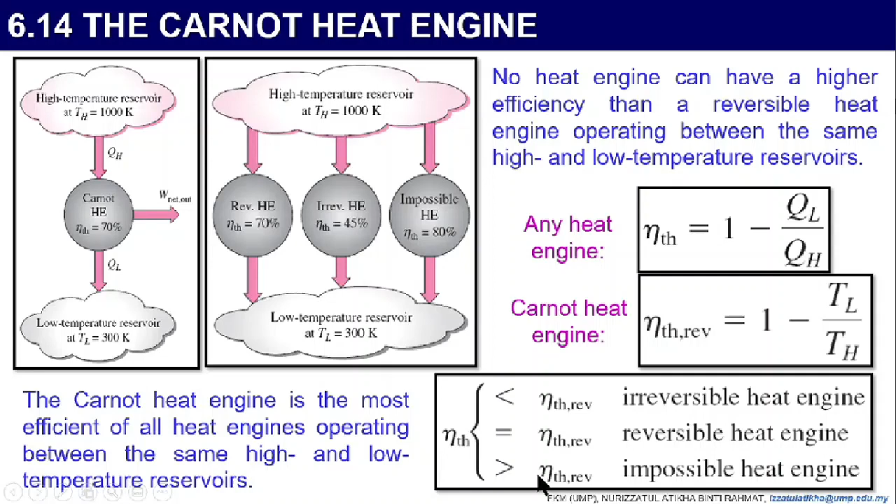So this is an example of the Carnot heat engine. For any heat engine, and for the Carnot heat engine, the thermal efficiency equation is quite tricky, so please be careful when using this equation. If the eta is lower, then it becomes the irreversible heat engine. If it is the same, it becomes the reversible heat engine. If it's larger, then it is an impossible heat engine.

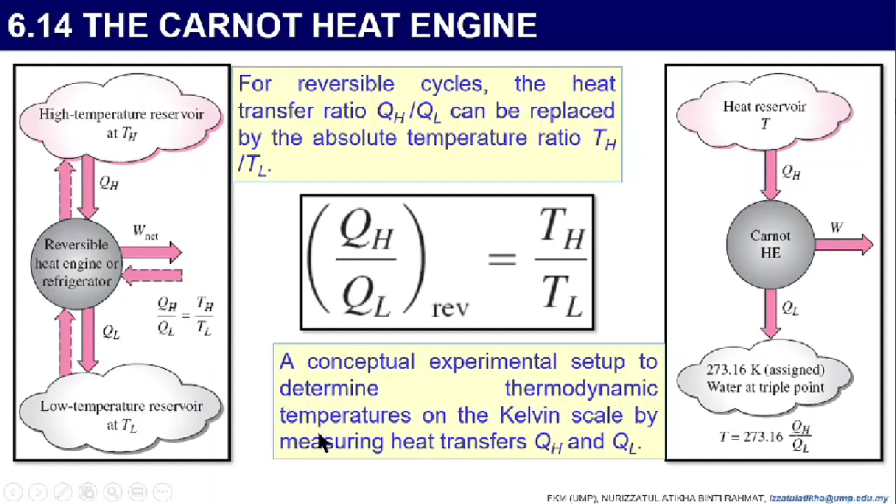So for the Carnot heat engine, for a reversible cycle, the heat transfer ratio QH over QL can be replaced by the absolute temperature ratio TH over TL. So that equation can be replaced by this equation. This is a conceptual experimental setup to determine the thermodynamic temperature on the Kelvin scale by measuring heat transfer QH and QL.

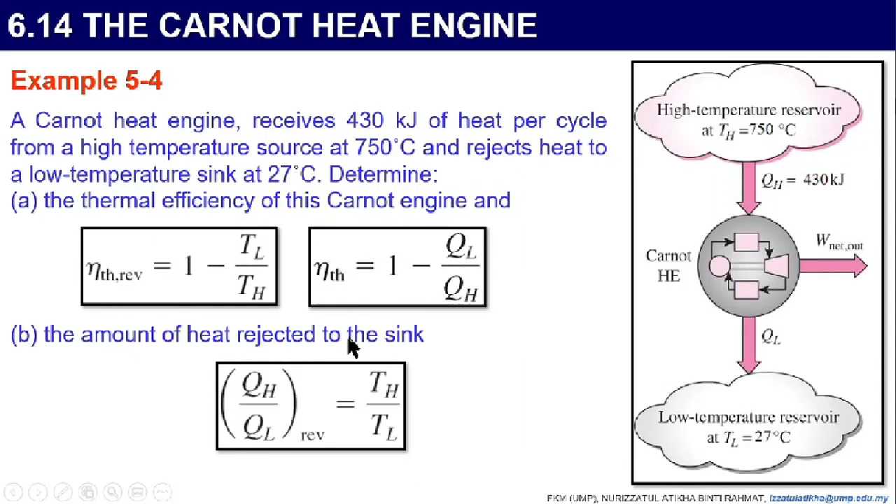This is another example for you guys to do. Please do it by yourself and refer to the answer given in this slide.

So in chapter 6, we have finished chapter 6. We introduced the second law of thermodynamics and the definition of thermal energy reservoir, and we learned about the heat engine, how it violates the Kelvin-Planck statement, and then refrigerator and heat pump, the Carnot cycle, the reverse Carnot cycle, and a little bit of the Carnot heat engine.